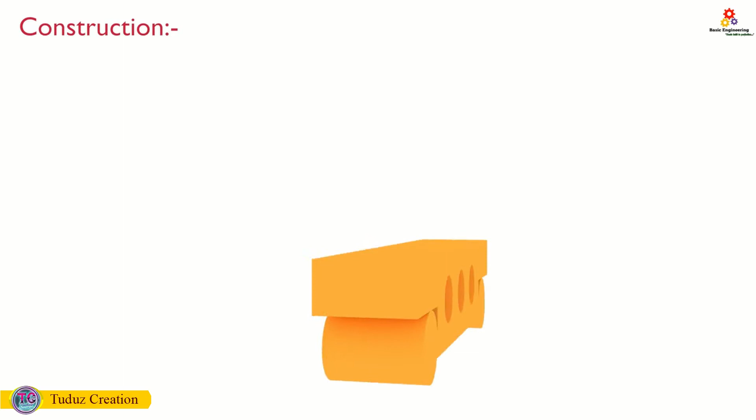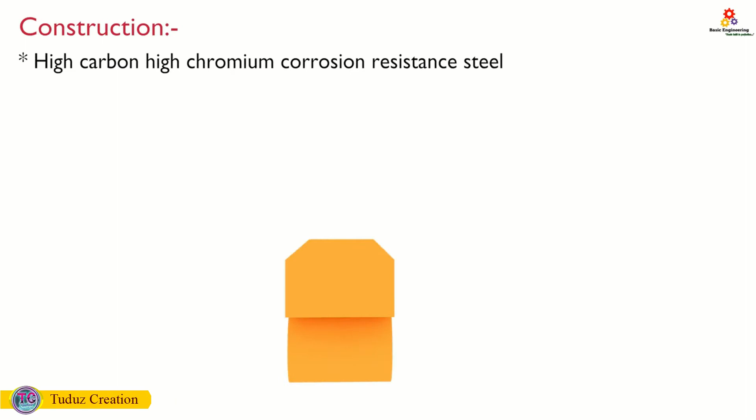First of all, let us understand the construction of sine bar. Sine bar is made up of high carbon, high chromium, corrosion resistant steel. The purpose of selecting this material is to avoid wear and tear of sine bar when handling, which eliminates the error and maintains its accuracy.

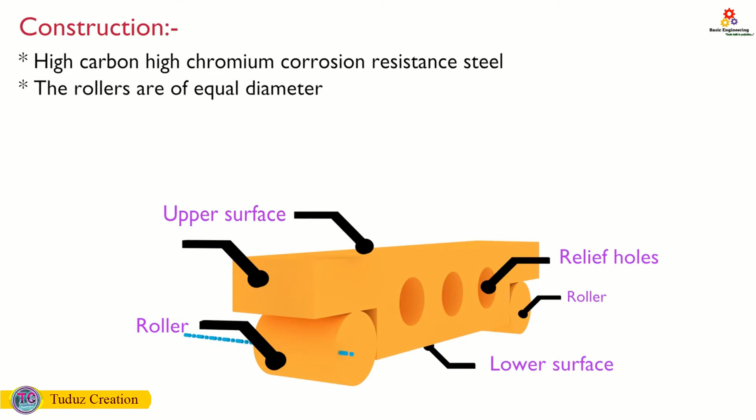Two rollers are attached at the end of steel bar. The rollers are of equal diameter and axes of these rollers are parallel to each other. The length of sine bar is nothing but center distance between two rollers. Generally, this center distance is of 100 mm, 200 mm or 300 mm. This length is very precise and exact. Relief holes are provided just to minimize the weight of sine bar.

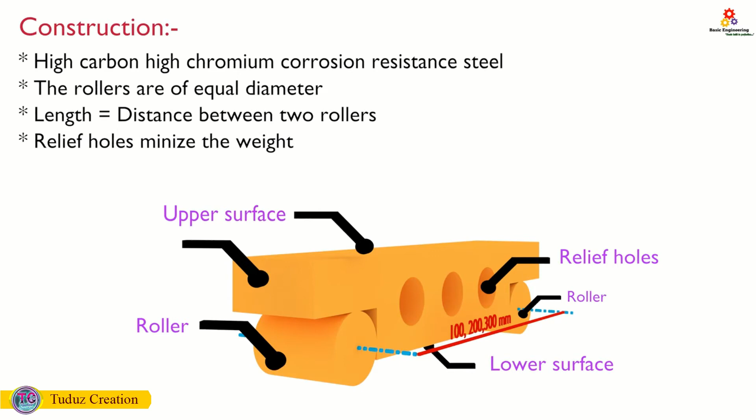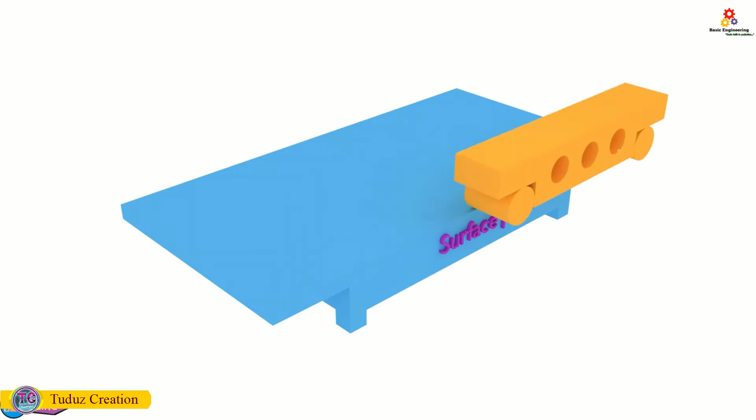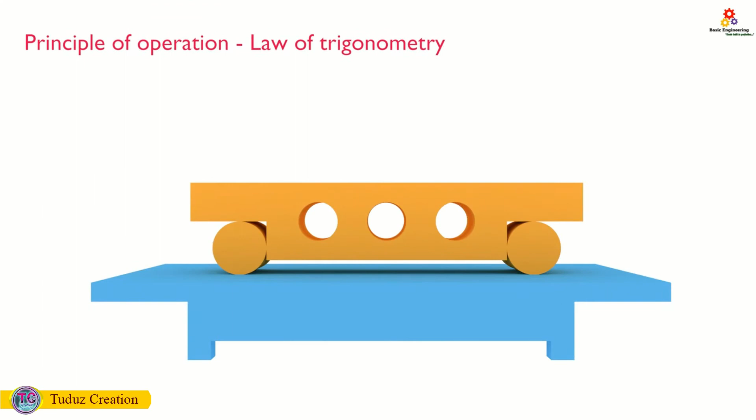Okay, now let us talk about surface plate. It can be assumed that surface plate provides exact horizontal surface to the sine bar. If we have the sine bar on surface plate, then upper surface of sine bar must be parallel to horizontal surface of surface plate. The principle of operation of sine bar is based on law of trigonometry.

If one roller of sine bar is placed on surface plate and other roller is placed on height of slip gauges, suppose the height of slip gauges is h. We know the length of sine bar. So if we take sine ratio, then sine theta will be opposite side upon hypotenuse. Means in this case sine theta is equals to h divided by L. Now we can calculate the angle. So theta is equals to sine inverse of h divided by L.

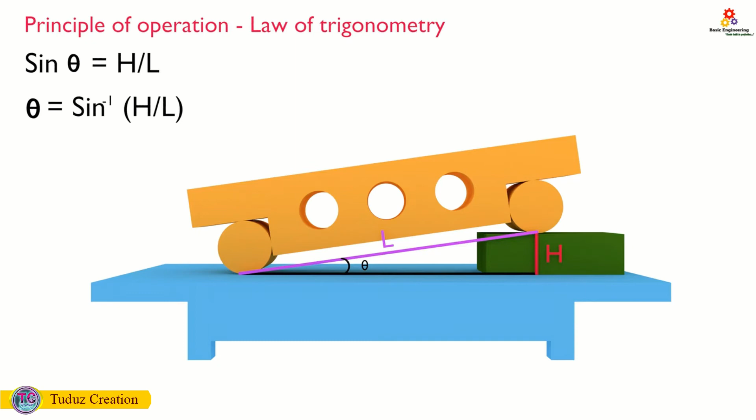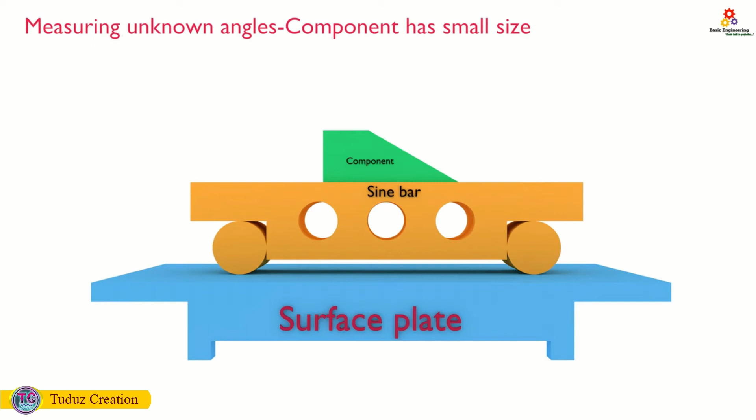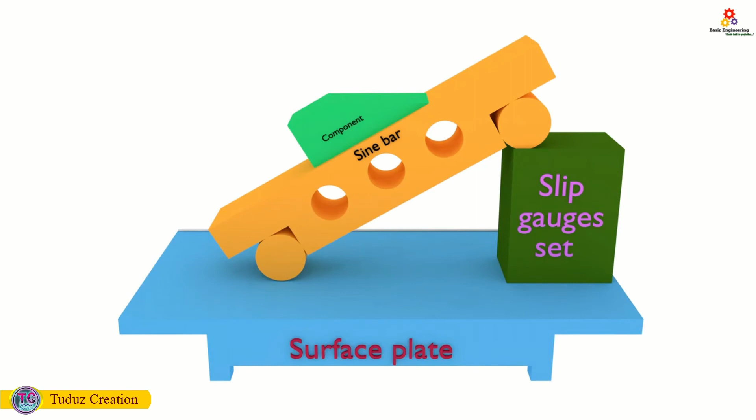Now let us see how to measure the unknown angle when the component is of small size. In this method, the component to be checked is placed over the upper surface of sine bar. Now we have to add the combination of slip gauges under the one roller and other roller is placed on surface plate. Adjust the height of slip gauges so that taper angle of workpiece will be exactly parallel to the surface plate. The parallelism of surfaces can be measured by dial gauge.

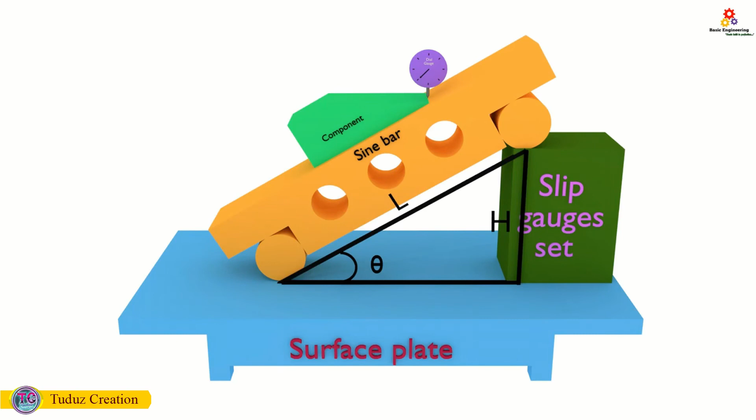If dial gauge shows zero deflection while traveling on the taper surface of workpiece, then we can say that both the surfaces are parallel to each other. Now in this triangle, we have height and length. Take the sine ratio. Sine theta is equals to h divided by L. Therefore theta is equals to sine inverse of h divided by L. And we will have the angle theta.

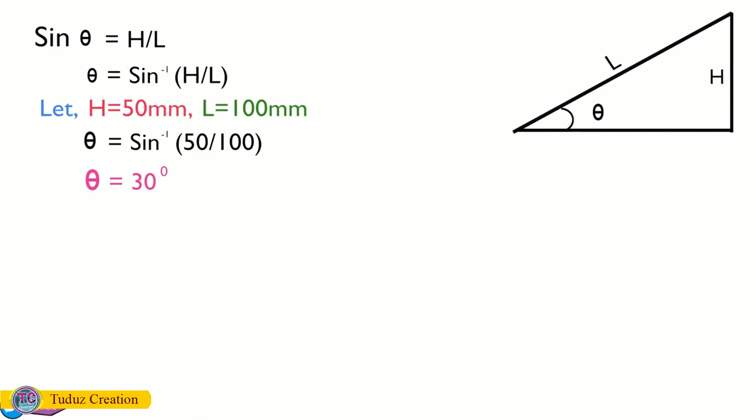Let us suppose the height of slip gauges is 50 mm and the center distance between the rollers is 100 mm. So in this case theta will be equal to 30 degree. If we have a workpiece like this, then how to calculate the taper angle? For that, we have to add a set of slip gauges under both rollers, so that lower surface of sine bar comes in contact with the taper angle.

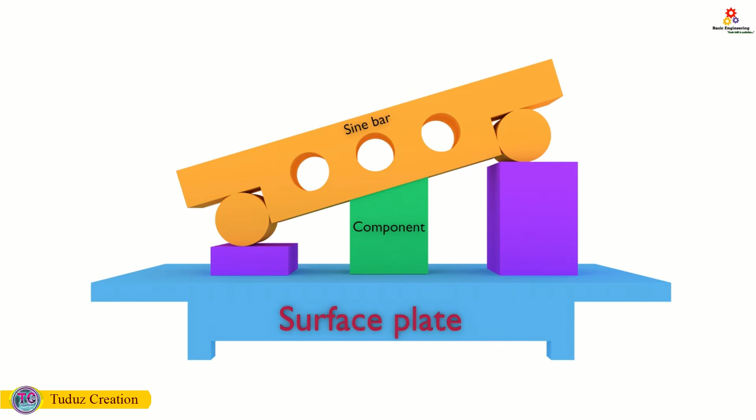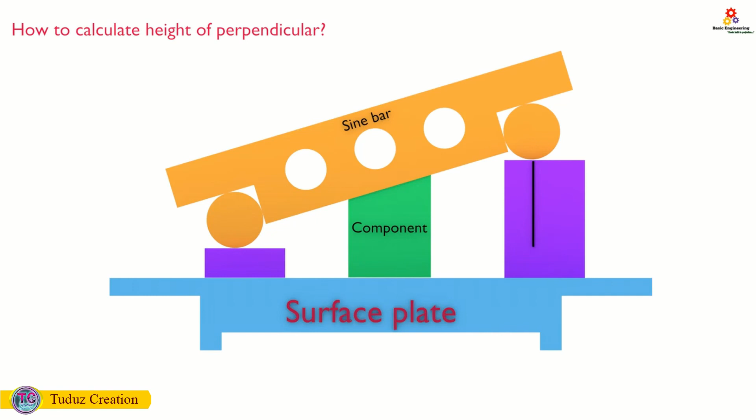In this case, how to calculate the height of perpendicular? Let us suppose this height is h1 and this height is h2. If I subtract h2 from h1, then I can have the height of perpendicular. So sine theta is equals to h1 minus h2 divided by L. If h1 is equals to 100 mm, h2 is